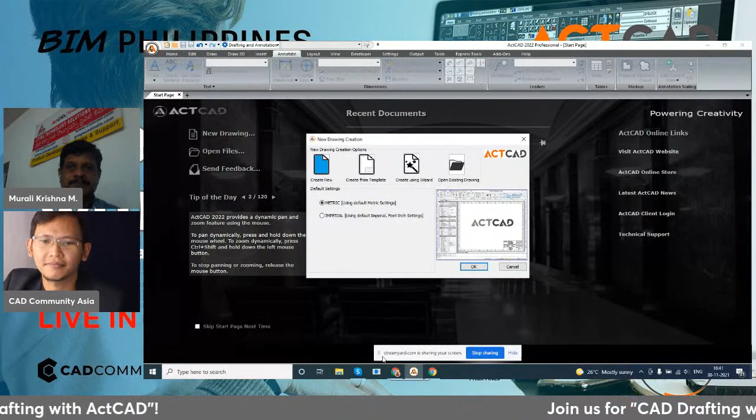I want to briefly explain about CAD software, computer-aided design. Most of you are familiar with it already. But way back in the 1960s and 70s, most companies did drafting manually. From 1980 onwards computers were introduced, and from 1990 onwards computers became available even at a personal level. Most companies and individual designers started using CAD for all their design applications.

Earlier, when I started my career in the automotive industry with Tata Motors, I started with a drafting board, designing drawings on big drafting machines. We used to set them at the desired angle, using engineering drafting devices like French curves, compasses, templates, protractors, dividers, and stencil pens to produce the drawing.

So a lot of manual process was there in the early 90s. But from the second half of the 90s, since 1995 onwards, a lot of CAD software came into the picture. Our original group, OMC Computers, started developing a CAD software in the early 90s called PowerCAD Draft, a DXF-based CAD software, which we sold to many companies in India, especially government establishments, and it gave some competition to AutoCAD in India at that time.

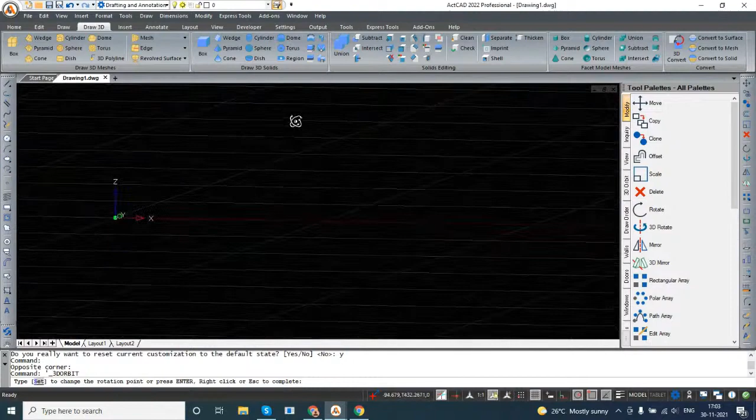Next is view. View is related to how your drawing is viewed in this CAD software. For example, regen, redraw all, zoom in, zoom out, zoom extents, dynamic zoom, panning operations, viewports, and 3D orbits, like creating and rotating this workspace in a 3D environment. So how I'm going to view my graphics window or my entities, these are all under that.

Similarly, here you'll see all the standard views, like visual styles such as wireframe model, conceptual. These are mostly applicable for 3D models, along with applying lighting, renderings, and materials. All these options are available here.

3D views is more important. If you want to migrate to orthographic projections, right now I rotated my screen to some level, but this command brings me to the front view. Or you can go to this menu, 3D views, and orient to front view, and my coordinates change to show the front view of this workspace. You can orient from any view to any view, even isometric, dimetric, trimetric views, all these options are available. For now, I'm setting it back to the top view.

So how you're going to view this workspace, the entire drawing, how you orient, rotate, zoom, and pan it, all these operations are provided under the view menu. Even the ribbons are mentioned in a similar fashion, like home, edit, draw, insert, view, layout, developer, settings, output, tools. This is more or less the same thing.

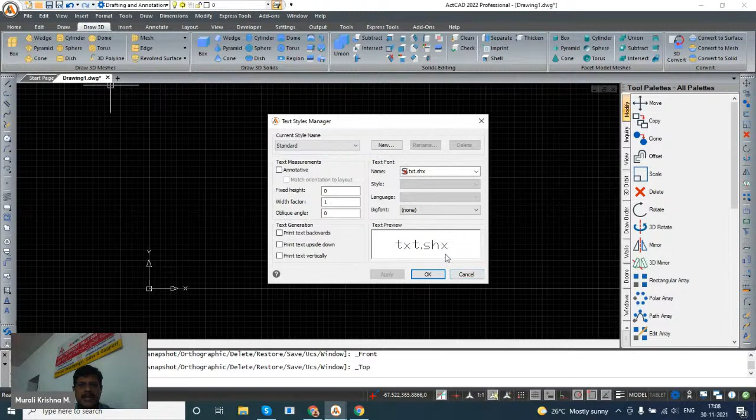Similarly, text styles manager—most of the styles, why we use styles is very important. It's a detailed subject, but briefly: in the drawing, if I'm having 1000 text entities or 2000 dimension entities, how do I control the style of all these as a kind of global setting? I can create any number of text styles, quickly modify them, and in one go select all text entities and apply this format, so I need not go back and change each entity's color, font, or text height individually.

Similarly, once a particular style is applied to dimensions, you can use multiple layers, multiple text styles, multiple dimension styles, multiple point styles, and several table styles. All these are possible—there's no limitation or restriction. Depending on the complexity of your drawing, you can create any number of dimension styles.

The advantage is that in dimension styles you can set a lot of preferences: how you want arrowheads, what types, what kind of text, what font, or what text style you want to apply to the drawing style. Similarly colors, extension lines, primary units, alternate units—everything. It's a very comprehensive dialog box where you can set all the properties of a dimension entity in one go and save it.

Once you save here, all 2000 dimensions in your drawing will reflect those changes. Similarly, if you want to change from one dimension style to another, it's very simple—you come back, create one more dimension style, change some or all settings, and apply.

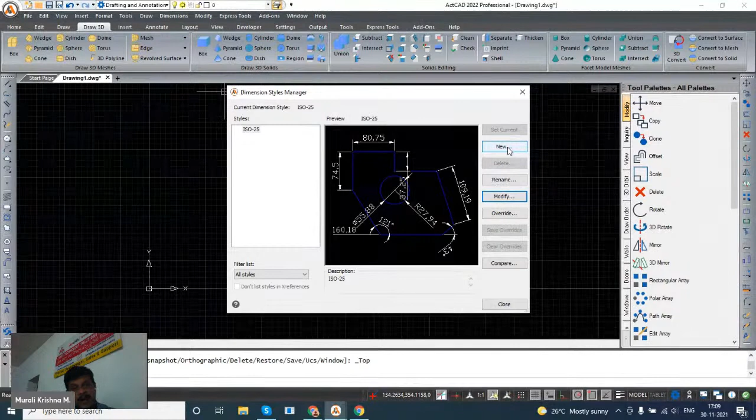So all these styles act like global settings to your drawing, and they reside inside your drawing database—they are part of the drawing database. If you create 10 dimension styles, they are part of your drawing file, in this case drawing1.dwg. Whether you use this drawing here or send it to your customer, friend, vendor, or supplier, all these styles will be transmitted along with the file. They don't stay outside the database; they are part of it.

That's why anyone can open this style again in ActCAD or any other software, say AutoCAD. They can edit or modify the styles there, and if they make changes, we identify them here too because the database is the same—we are reading from the same DWG database.

Everything related to formatting your entities—layers, layouts, colors, line types, line weights—how you want to represent your entities in a given drawing, you can find such commands easily on the Format menu.

Now Tools, as the name implies, these are additional tools to get more information from the drawing or perform operations on it. For example, we have ActCAD Explorer, which I'll explain later—how many layers, blocks, line types, or text styles are used in the drawing.

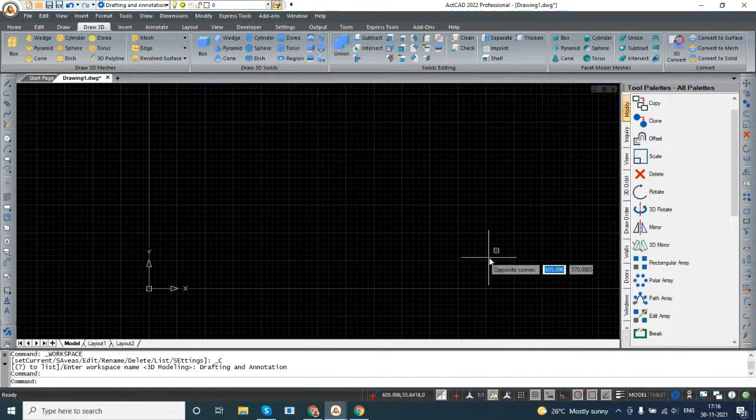Now dimensions, as dimensions are very vital in engineering drawing, we have created a separate menu with various types of dimensions like linear, aligned, angular, ordinate dimensions, radius, center marks, tolerances, geometric dimensioning and tolerancing, and again managing these dimensions, like one more link.

Though basically it is the same link, as I've shown under the format menu, this is available under the styles manager, for saving and restoring styles. Everything related to your dimensions, whether baseline dimensions, continuous dimensions, ordinate dimensions, or tolerated dimensions, size tolerances, geometric tolerances, everything is available under this menu.

Now, modify. As the name indicates, if you want to modify any of your entities, one or more of these entities, you will find those options here, like getting the properties palette, matching properties from one entity to other entities, creating groups, exploding groups, ungrouping them, and deleting, copying, cloning, modifying, mirroring, and alignment.

We also support associative arrays, rectangular array, polar array, path array, all these options, whatever modifications you want to do to these entities. Similarly, trimming entities, extending them, breaking them, joining, applying chamfers, fillets, editing tables, all those entity modifications. When I said edit, that is at the file level. When I'm talking about the modify menu, these are at the entity level. I hope you understand the difference.

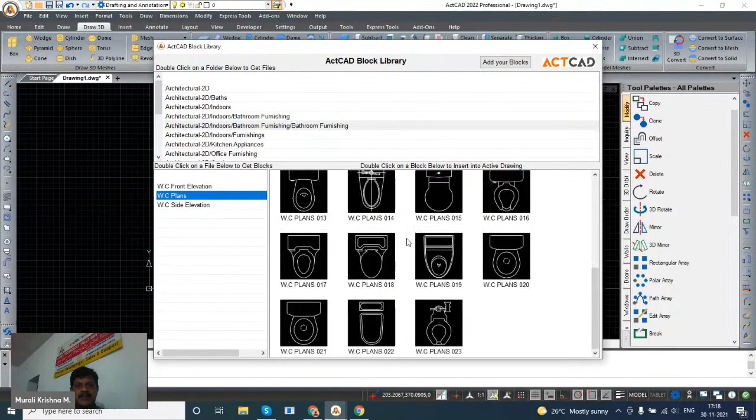So these are like opening a PDF and directly editing, converting a vector PDF directly to DXF. Similarly, using our block library, if I want to insert any standard symbols from this, you can directly insert that into your drawing, and you can adjust the X scale, Y scale, as well as the rotation. Now, if you go back, your symbol is inserted into the drawing as a block. ActCAD comes with over 5,000 inbuilt blocks in it.

Similarly, unit converter, auditing drawings, extract block attributes to an Excel sheet, importing point data from CSV or Excel files, and text data if you want to import from CSV, changing numeric text values, capturing the points to Excel. Lots of advanced options are available.

When you start your trial, we will give you the free videos module where you can see the importance of all these utilities. Hole table is very important for mechanical. Similarly, exporting a table to an Excel sheet, or importing table data from an Excel sheet. Next month, meaning December, we will have one more release, and we are making a lot of improvements with the Excel integration to the CAD format. Like that, these add-ons are available.

And window, like any other Windows application - close, you can open multiple things. Here I have the start page, here I have the drawing. Like that, I can have multiple drawings. You can close them, or close all, cascade them, tile them horizontally, or tile them vertically. All these options, like arrange icons if you have more documents open. But right now I have only this one. So if I want to make my start page active, I can do this. And again in the window, I am disabling the cascading options. So now you can switch these options using these window tools.

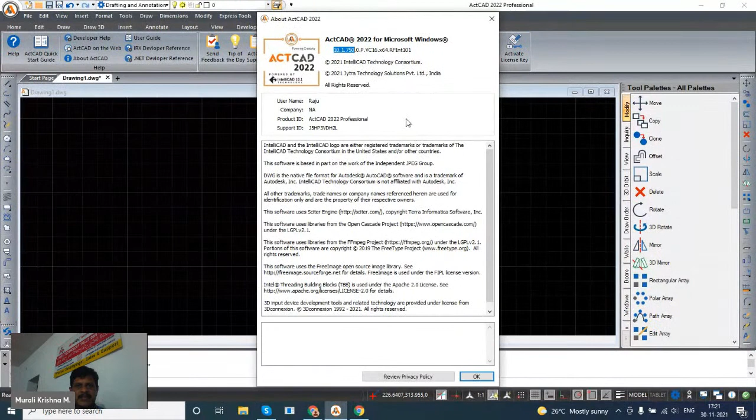Finally, the help menu. As you understand, any software will have complete help, developer help, user guide, tip of the day, our website, check for any new version available for this product on our server. If you want to send feedback to us, benchmarking graphics, and about ActCAD, which version you are using at present - 10.1 is the latest release of IntelliCAD, and 750 is the latest version available. Every month we do a lot of releases and patches, and you need not reinstall or uninstall the software. You simply go to the help menu and click on check for updates, and it will find if there is a new version available on our server, and automatically download and apply the patch to the installed version without the need of re-licensing.

So the menus, the ribbon tabs are also carefully designed, like draw, 3D, insert, annotate. The names are slightly different, like the layout tab is available here, view is available, and developer for developers and programmers who want to record scripts, writing programs like LISP, C++, VB.NET. If you want to write more programs, you can use all the options here.

And settings, as I mentioned, like options - for example, if you want to control drawing options, drawing limits, drawing settings, workspace settings. If I click this, what is my default save format? If I always want to save my drawing in 2007 format, or save my drawing every 2 or 3 minutes, what are the default file paths for support paths, templates, hatches, line types, blocks, hatch patterns. This is also very similar to other CAD software, but you can set all these options at this level. Now, these options are at the application level. When I mean application, it is nothing but ActCAD. ActCAD is a software package, it is an application.

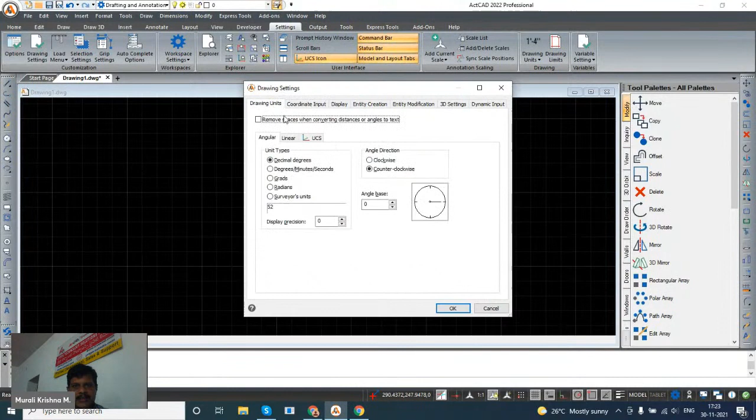Like drawing settings, if you want to set the drawing limits or settings, you can specify them here. There are keyboard shortcuts available too, like DS is the shortcut. Right now you can see the drawing settings, like drawing units, angular settings, linear settings, UCS settings.

Coordinate inputs, how you want them, snap and grid whether you want to enable them, and entity snaps, which we identified earlier. Now entity selections, whether I want to increase or reduce this pick box size, or the selection aperture, or entity snap representations, and the drawing limits, tracking.

All the settings related to your drawing can be made here. These settings are applicable to a particular drawing or the active document you are using. So this is the brief overview, and this is called the graphics menu, and these are called toolbars.

Toolbars can always be moved either horizontally or kept here. If you want to show more, right click here to see which menus you want to show or disable. There are so many toolbars available; if you always work with images, you can enable the image toolbar and keep it here, and close it if you don't need it.

So there are many toolbars available, and this is called tool palettes. The most widely used things and most important commands are all available here.

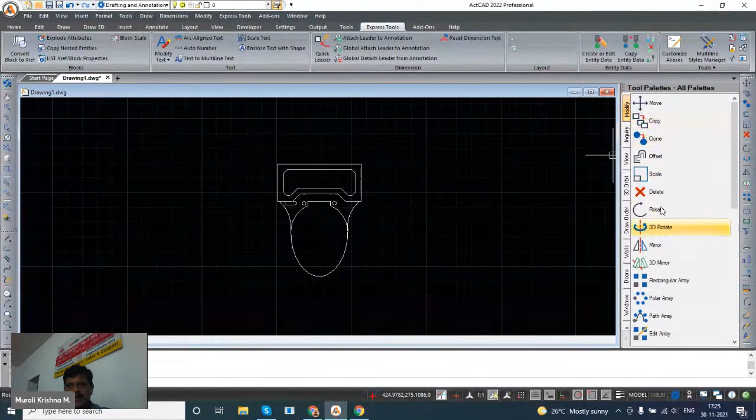Similarly, if you click inquiry, tools are available here. If you click view, as mentioned before, like front view, top view, side view, instead of going to the menus you can click directly here to access those commands. And again the 3D options, draw orders, changing, inserting walls, doors, windows.

You can also insert more tool palettes to your stuff and create your own. If you have popular settings, you can add them here too. These are some standard symbols, and you can directly double click to insert them into the drawing.

You can customize these tool palettes based on the expert level or advanced options you need—add, remove, or move them—and again this is the toolbar. And as you see, this is the command prompt.

Whatever inputs or inquiries you want to give, this is the command prompt. If you want to see a bigger version, simply press F2, and all those keyboard shortcuts and function keys are available here. Now you see here, this is F2.

F3 for enabling or disabling entity snaps. Tablet options, F4. And isometric cursor, if you want to draw in isometric mode, simply enable F5, and then your cursor will behave like an isometric constructor.

If you want to display the coordinates, they are being shown here. And if you want to enable the grid, the graphics grid on the back end, F7 is the shortcut. And orthogonal, entity snaps.

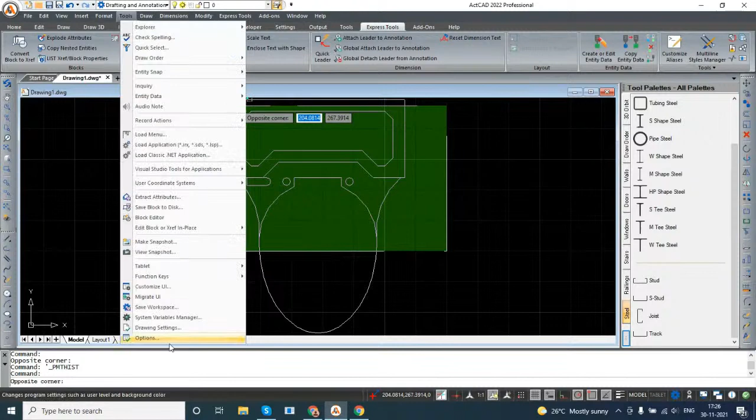If you want these settings, we provide them under the customize menu, like under tools you have these options. Similarly, customize user interface, customize UI—here again we have all these workspaces, whatever we have defined.

You can define your own workspaces, either through this interactive customization dialog, or you can go back to the CUI file available in the install directory, and make a lot of changes—creating new toolbars, removing some toolbars, inserting new ribbon tabs, all those things.

Similarly, aliases, and these are the keyboard shortcuts I explained, like F1, F10, F2. If you want to make any change, you can always click and change it here, or for F5 if you want to use something else, you can change it.

But mostly we keep them very similar to other CAD software, because most people, for example, F8 meaning ortho mode, are already habituated in other software, and we don't want to give some other shortcut for that.

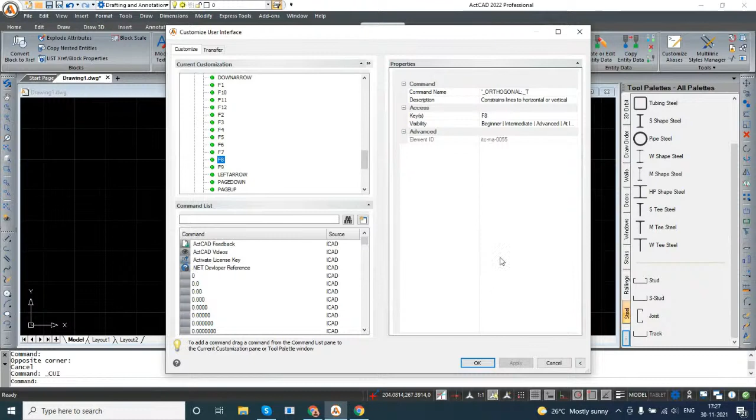So that's the reason we are maintaining the same F8 kind of stuff here. Like this, you can also create, and you can import the settings from other software, and export CUI files - that interactively you can do.

The keyboard shortcuts are also all available here. For example, beside everything you have Control Plus, Control Plus 1, Control Plus S. You can create and customize everything in your CUI file, either interactively, or based on your expertise level, you can go to the CUI file directly and make necessary changes. We also support CUIX, the encrypted format of CUI, which is now supported in ActCAD. You can import it if it was created in other software. So like that, you can do a lot of customization.

Once again, this is the bottom panel. Here it always shows the indicator and the message. For example, if I go back to the home menu and click Line, now I'm creating a line, and you are able to see dynamically the coordinates of that one. We also support dynamic screen input, like how we are creating here, and all the options are available here. Now it is showing the current status.

For example, if I want to insert a block, this block I already have in the database, so now I'm able to repeat it once I get into the same drawing. And you are able to see the cursor movement and the coordinates here.

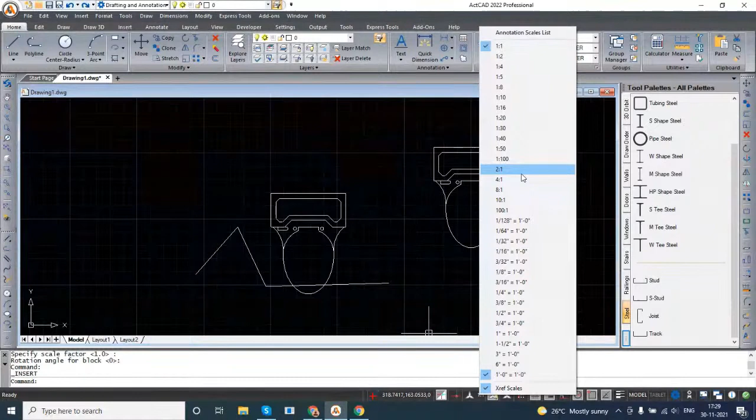And this one is cursor mode, whether you want to enable or disable, and the crosshair mode, how you want to show them, and annotation scales, annotative scales. Once you want to plot your drawing entities at a different scale with respect to your paper size or plotter size, you can use the annotative scales, and all the supported annotative scales are available here. Similarly, how they want to be visible, all the settings are here.

And here, snapping mode - how you want to snap to these entities, enable running snaps or disable running snaps. If you are enabling running snaps, whenever you keep clicking on these things, it will automatically try to snap to the control points. And if you click on settings, you will get the snap and grid settings here. And entity snaps, as I mentioned before, like endpoint, start point, whatever is default enabled - whether you want to select them all, clear them all, or show only the major ones. So you can do the settings, and either apply or cancel.

The other thing is dynamic screen mode input - if you want to switch it in or out. What is dynamic screen mode? For example, if I'm typing, 112 is there. Now I can directly type the value here. So that particular line has already taken this value. Now if I want to type 80, the line length is automatically taken as 80. So this input, I can dynamically enter my values on the screen graphics window itself, instead of coming to the command prompt. That is dynamic input. Whether you want to enable or disable it, you can do that here.

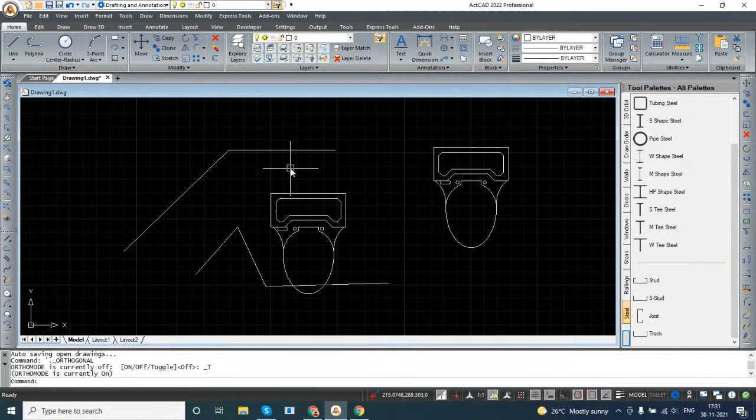And ortho mode, again F8. If you want to enable it, while drawing a line, you can also use the Shift button. If you want to send it either perfectly horizontal or perfectly vertical, ortho mode has to be on. For example, if I switch this off, it can go into any direction. Now if I switch it off, it is going in any angle, not assuming it should snap to perfectly horizontal or vertical. So if you enable ortho mode, like in orthographic projections, that will help take perpendicular lines from the current cursor location.

The next one is polar tracking. If you want to enable polar tracking, with respect to the point while drawing a line, you can snap to a specific angle value - whether you want to set it at an increment of 5 degrees, 10 degrees, or 6 degrees, you can do that.

And as I mentioned earlier, these are all the entity snaps. Either you can go and do it from drawing settings, or from the tools menu, or directly from right click. We have given the popular shortcuts here, and either you can enable or disable them. Similarly, if you come and...

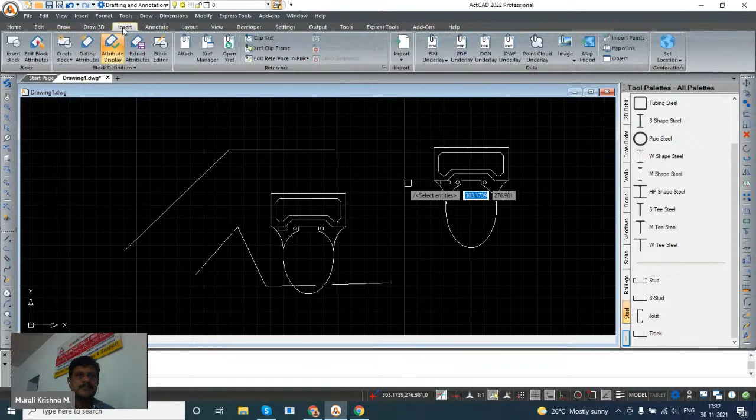In the draw menu, all these settings are also provided. This is the example of running snaps. If you are having some problem picking entities, you can enable these running snaps, and the software will behave a little intelligent and try to capture the snap points from other locations. The same settings are available from multiple locations, including this bottom menu which we can access from here.

This is about line weight display, entity track, and line weights, whether you want to enable or disable the display. So if the line weight is 2mm, enabling this will display it at 2mm. Depending on your requirement, you can either enable or disable it.

As I mentioned, this is switching between the workspaces. And this is another thing about our graphic device.

In ActCAD, we support 3 modes: basic mode, OpenGL mode, and OpenGL ES mode. Right now the advanced OpenGL ES is disabled because there are still some compatibility and stability issues with the OpenGL ES graphics drivers. But the default setting is OpenGL. To operate ActCAD software, you don't need dedicated graphics hardware — whatever drivers you have, onboard or dedicated, every computer will have an OpenGL version, and we need at least version 2.0 of OpenGL. If you have a higher version, it's better — you can get better graphics performance from the software.

Before going to the next topic, I wanted to show you the most important thing here. As I mentioned, there are a lot of system variables. What is a system variable? Most users may not be aware. There are a lot of variables available inside the drawing database — for example, file dia, which controls how something should be displayed. Now we have all these system variables available, along with their limits.

For example, CMD echo — if you check it, it shows a range of 0 and 1, determining whether it should display or not in the command prompt. Similarly, if I want to change the pick box — the pick box I showed you earlier from the dialog.

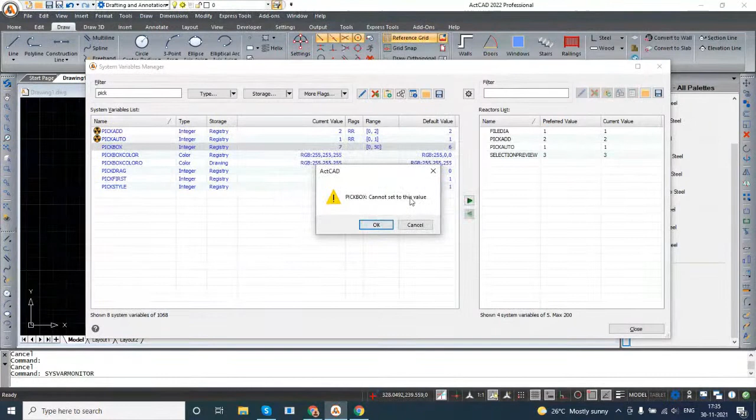Now if you see, the pick box entity is available here, and what is the current value? I set it to 7. But what is the permitted range? 0 to 50. And what is the default value? 6. So if I want, I can even modify them here — this is the value I can change. But if I try to give 99, I'll get a warning, because it cannot go beyond the permitted values.

What are these variables? These are nothing but the settings or preferences or values available inside the drawing — for example, pick first behavior, either set to 0 or 1. A lot of advanced CAD users are familiar with these system variables.

But what I wanted to show is we have a sysvar monitor if you want to quickly find some settings inside ActCAD. For example, if somebody wants to increase the text quality, I'll repeat using this sysvar monitor, and type 'text'. Now all the system variables related to this are coming up.

What is QText mode, print text output, mtext ed — these variables are very much similar to AutoCAD. Now here, text quality — at what quality do I want to set the value? 0 and 100, so the least value is 0 and the maximum value is 100.

Similarly, text size — this is how you define these values and settings. All the system variables are part of your drawing; they are saved inside your drawing file. If you change this value and save the drawing, it becomes part of the drawing, and if you open it in another ActCAD version or a competitor software, the same value will be reflected there. Similarly, text style — what is the default style, whether you always want to keep standard or something else, because right now this default drawing has only one text style.

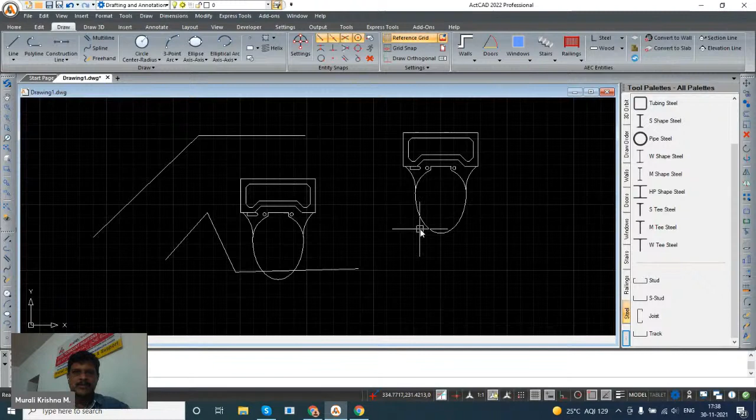Before I forget, this Explorer is another useful tool available in ActCAD. If you double click text styles, it will show all the available text styles in this drawing, and line types - what line types are available and what they've used. Layers, layer status, what views we have created, and what blocks are used in this drawing.

So if I'm double clicking this block, it will show up. Okay, so it is opening all these things at the bottom.

Keep on going here. Maybe I can map them here. So like this, it will open up all the things under the palette, and how you are going to display them, you can find here. So like this, now text styles opened here.

Now you go back. You can also separate them like this - I have taken it out from here. Now again, you can dock, auto hide, make transparent, or if you want to close, you can close. Come back to the Explorer, it is available.

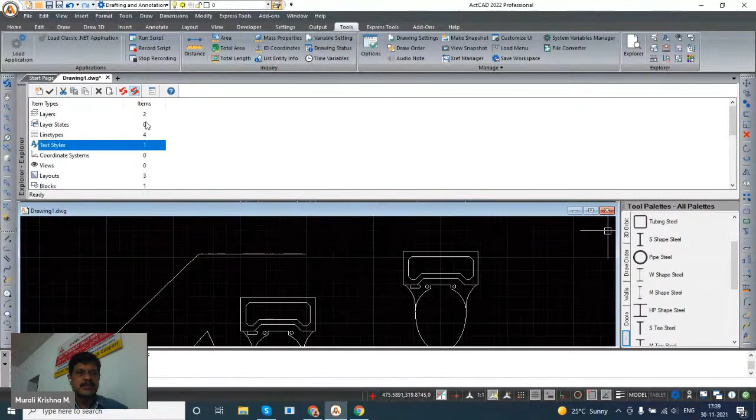What are the external references available in this drawing? Right now it shows 0 items are used. What are the current blocks in this? Now double click, this is the WC plans. How are you going to orient this one? You have to set whether you want this Explorer to be horizontal or vertical. But copying the block from one drawing to another drawing is also possible.

For example, I have created one more drawing here. Now I am coming here from the Explorer, double clicking the block, selecting it, copying, and coming here under this block to paste it. Now this block from this drawing I have easily copied and pasted into this one. Now it is part of this drawing's database. Let me go back and insert.

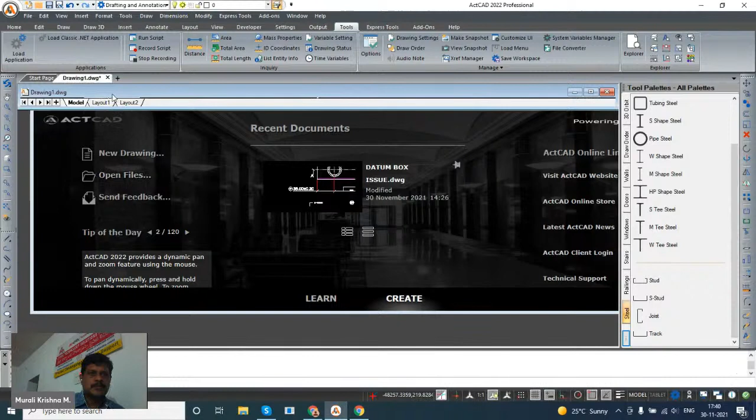Now you see, that is part of your second database also - whatever is here in the other drawing. I am going to the Explorer once again, paste it. Close here, close here. And again in this drawing, if you go to insert block, that is already available because I already pasted it into the database. So even if you have 20, 30, 40 or any number of blocks, from one drawing to another drawing you can easily copy and paste.

These are, you are pasting them as blocks. But it is not only related to blocks, it is related to anything else - like dimension styles you can copy paste, layouts you can copy paste, materials you can copy paste, groups you can copy paste. So this ActCAD Explorer is also another powerful tool.

And now we also talk quickly about model space and layout space. I am closing this drawing. Model space means this is the 3D modeling space, and layout is basically a kind of paper space.

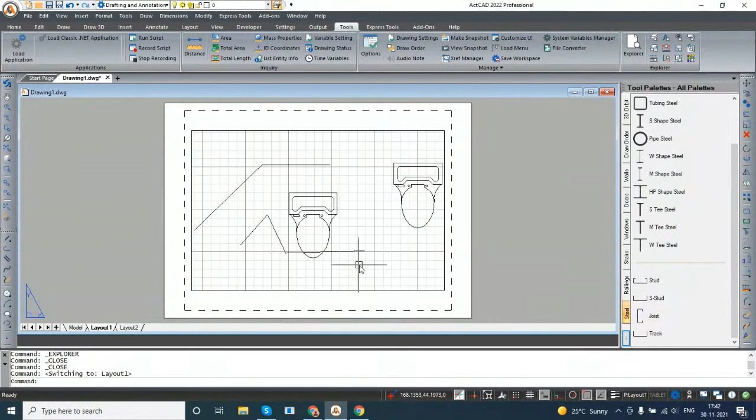So you cannot rotate these views, it is only a 2D representation. And whatever you are seeing here, these are called viewports - like the view boundaries, how I can adjust, and this is the position of the view. So it has nothing to do with the entity you are drawing. Even if you delete it here, you are only deleting the representation, but if you go back to the model space, that entity is still there.

So what is the advantage of this model space and layout space? Now I am having this entity here, and here I can insert viewports. You can also go to the layout, and here we have viewports. If I want to insert 4 viewports, you select from here to here, one layout or multiple viewports - it's all possible here. 2 viewports if I want to insert.

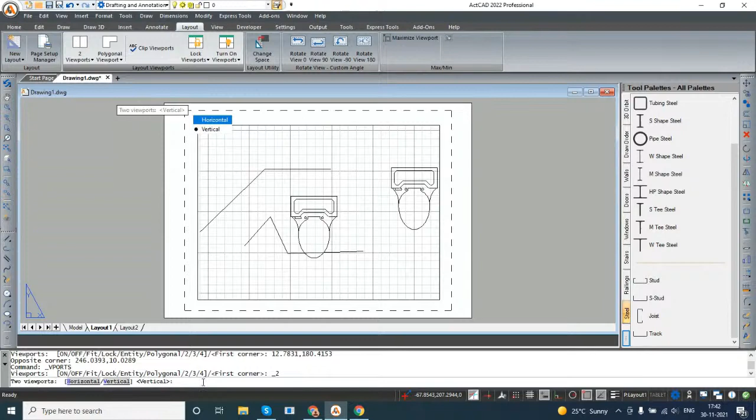Again, it asks horizontal or vertical - vertical. Now it is asking the first point of the screen and second. Okay, now it has inserted 2. See here, now this is one boundary, this is the other boundary.

And you can use them in 3D models - for example, if you have a 3D model, you can insert front view, side view, top view directly from the 3D model based on availability. Now, in this case, I right click and set the properties. This is available at a particular scale - this is the custom scale. Let me put it as 1.

So now, in this drawing, I'm showing this western commode at 1:1 scale. But in the other drawing, I wanted to show it in double scale or half scale. Again, you go here and change the scale, maybe to 2 here. So this is double the scale, and you can adjust the boundary and position as needed.

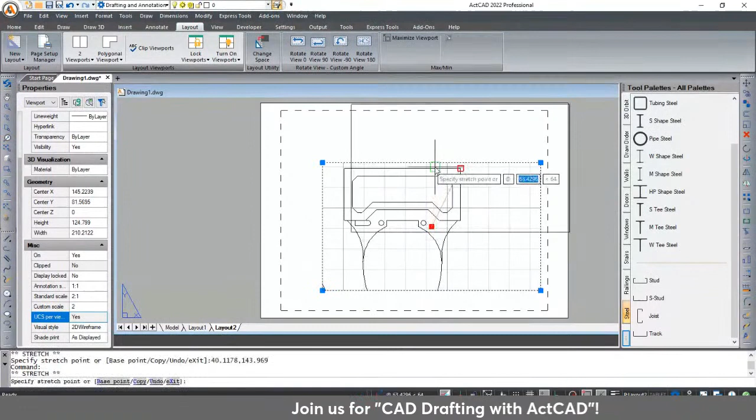Now, the same entity in this view I am showing as 2:1 scale. In this layout, I am showing it 1:1 scale, like a detail view. Whatever modification I make to this one, the changes will reflect in both views. For example, if I rotate this here, that is the model space, and it has associativity to this one.

So now this is rotated here too. This is mostly for plotting purposes, creating 2D views, orthographic views, and giving dimensions, irrespective of the original geometry scale. For example, if you are designing a very big vehicle, the actual size is too big, but you cannot plot that original size to the drawing. That's why you can insert a view at an increased or reduced scale. So that is the concept of viewports, layouts, and model space.

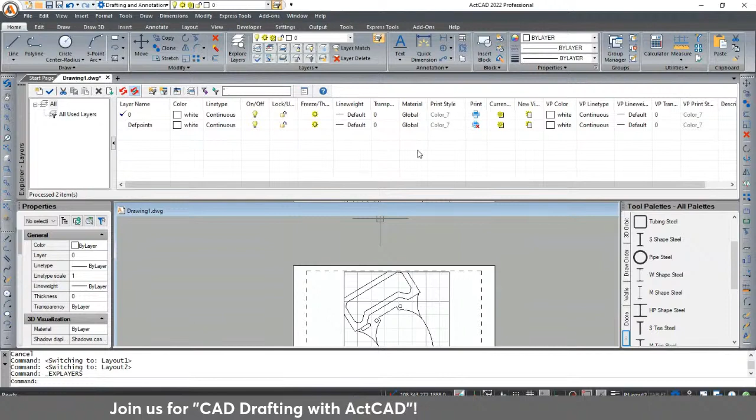Now I have one more topic I wanted to convey, the concept of layers. For example, if you go to the home tab, here is Explore Layers. So what is the concept of layers? In order to manage all these entities in your drawing, you can define an infinite number of layers.

For example, I am coming to this particular drawing once again. Now I'm able to see the model space. Now I want to move this to a different layer, for example layer number 2. I don't want to see this one, so maybe I can set this layer, move it to the layer, or in the properties palette you can directly go and set it to layer number 2. Now those entities are on layer number 2.

For layer number 2, I can also apply different kinds of styles. Let's say I change the color, change the line width, the locking concept, or the line type—I want to change it to dashed lines for all entities on that particular layer. And if I don't want to show them, I can simply switch that layer on or off.

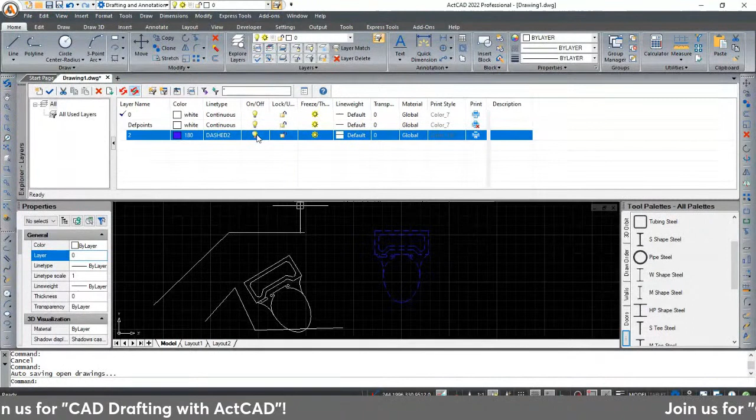It is like plastic sheets. You can create the plastic sheets one behind the other, one above the other, and create different entities on different plastic sheets. If you remember the old overhead projector kind of stuff, if you keep one sheet, the contents drawn on the plastic sheet are only projected to the screen. And if you overlap one more plastic sheet with different entities, then both can be seen on the screen after projection. So like that, you can insert multiple layers.

So those are the physical plastic layers which are transparent, but here these are the digital layers available inside the CAD software as layers, and you can create an infinite number of layers.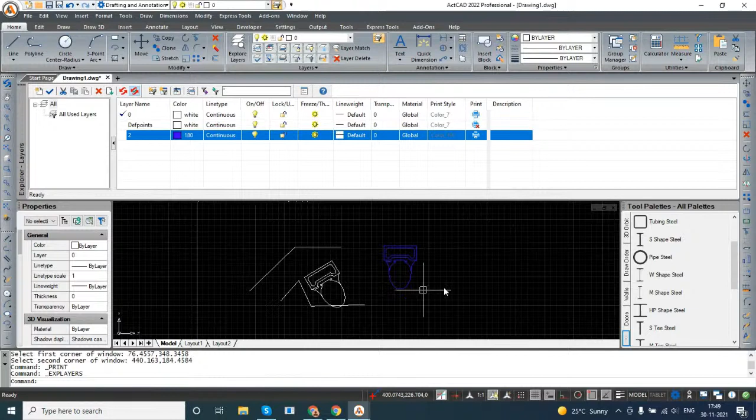So you can go back and unlock it, and you can change the line colors. At a global level, for all the entities in this particular layer, these changes are applicable. There are so many advantages of layers, which we have explained in our quick start guide and also in the detailed help menu.

So that is the concept of layers, and you can create any number of layers without any limitations. You can name them any name you want, like doors, windows, and our 3D entities like AEC objects for the BIM elements. If you are inserting a wall, automatically a wall layer will be created. If you are inserting a table, the table will go to the default layer.

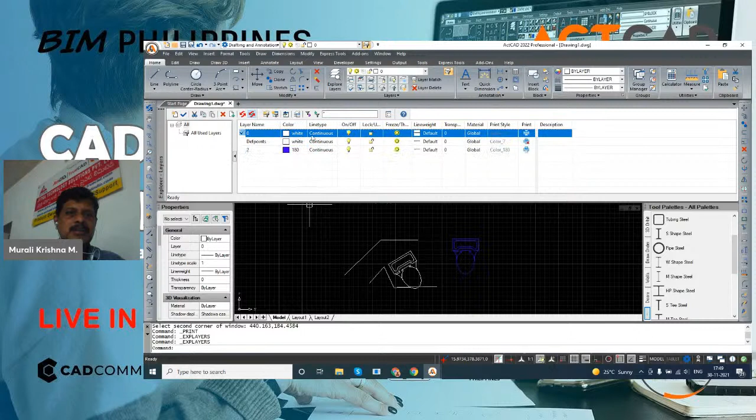There always has to be some work layer, which has this check mark - that is the default layer. Whatever entity you are creating or drawing will go and stay in this layer by default. If you want, you can always change it through right click, in what is called the properties palette.

Now for some of these operations, with the mouse wheel, if I'm rotating, that does zoom in and zoom out. Similarly, if you right click, you have so many options like real-time panning and real-time zoom.

If you want to do it in a 3D sphere, to rotate and see - these are all planar entities, 2D planar entities. But if I want to rotate them, right now I'm not doing any 3D modeling in this, but you can directly see all of them here. And if I want to cancel and go back to my other view...

View menu, 3D views, and then top view. So here also under the view menu, you have most of these zoom operations: dynamic zoom, previous, zoom to previous, zoom left, and most of the time we use zoom extents - Z enter and E enter.

Now when I'm typing the zoom command, it shows multiple options here, like zoom in or zoom out, zoom all, zoom center, or dynamic. And for extension, when I used E, it took extents - sorry, because that starts with E. That is the kind of syntax and the level you can always follow throughout this one.

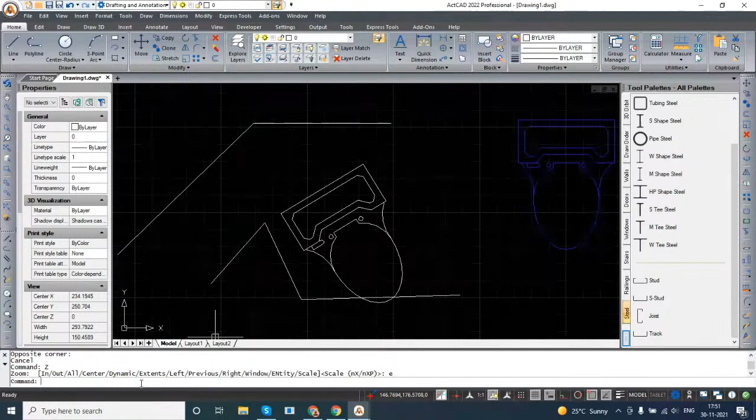We also support clickable keywords. For example, when I'm typing zoom, instead of clicking, you can also do the right option. Now it is asking what is the upper right corner, and you do this. So whatever the value from here to here, whatever the distance, with that much scale factor it has scaled, zoomed my entities.

Basically, it is not changing the size of the entities. The zoom and pan operations are basically enabling you to see it better, because your graphics window space is limited - you have a very small screen and cannot see a very big drawing there.

If you want to do some operation, you can zoom in here, and REA is a command like regen all. When you do it, now it is zoomed properly and you can perform your operations here. Like if I want to do a hatch inside this one, you can select and then click the point, enter, and do it.

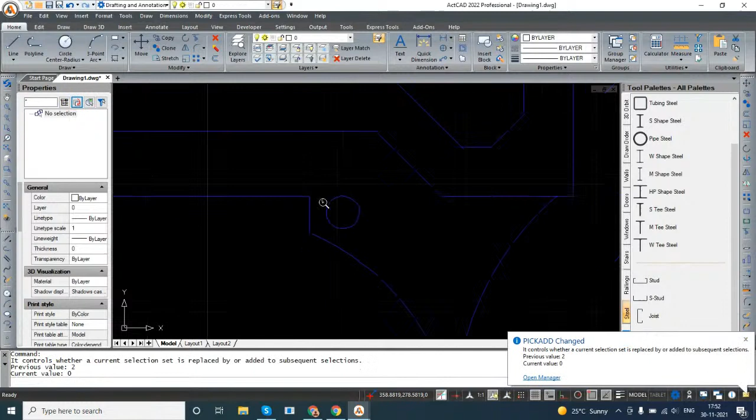But right now that hatch is not visible because the entity scale is very small. So that is the reason I need to select the hatch entity, and then increase or decrease the scale. Maybe I can show it on a separate entity - like this circle, I am applying hatch.

Now you see, because this circle is much bigger, for that particular scale it is visible, but because this diameter is very small, that is not visible. So like that, you can select these entities and do that.

And if you want to select such entities, you can also use this quick filter, and filter options are always available - layer 1, layer 2, like you see here. Now I'm getting the hatch. From the tool palette, when I'm enabling that, I want to reduce it because that was no longer visible to me on the screen for selection. But when I selected like this, I'm able to see that.

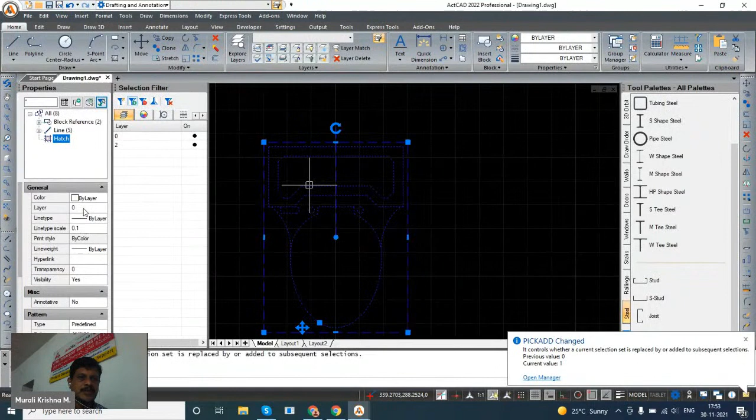Okay, now I'm going to the filter option. Layer 0, this entity is available, and this maybe I will still reduce. Okay, this scale I have to change to 0.1. You see, you are able to see that. So though I am unable to see the entity, the entity got created earlier.

So now if you want to delete, you can select it and delete it from your drawing. So these are all the advantages of creating the zoom in, pan operations, dynamic pan, dynamic rotation, like that.

And as I mentioned before, the entity snaps - if I want to select the endpoint of this, let us do one small activity here. Okay, this is the polar tracking. Now entity snaps, I have cleared everything. Now if I want to draw one line exactly to this one, you see it is not allowing me to do that. So that is called entity snaps.

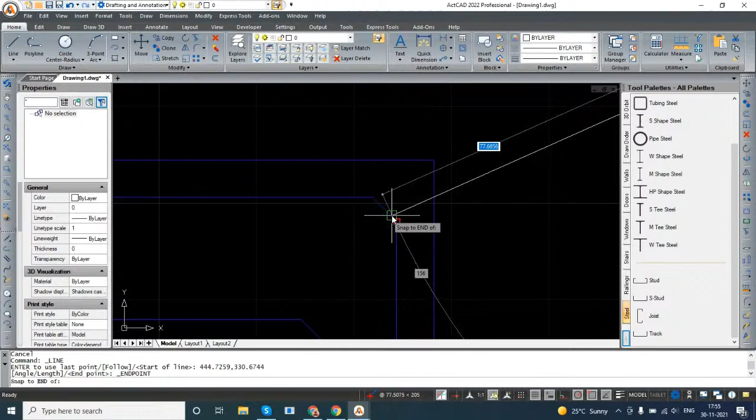Now I'm going back to this one. In the settings, now I am enabling, let's say, endpoint. Okay, now you see I'm able to pick the endpoints, but not the midpoint here. So here also I'm unable to meet it. Either I can click that endpoint or this endpoint or this endpoint or this endpoint.

So based on your requirement, you can go to these snap settings and enable nearest, perpendicular, parallel, or quadrant. Now you see it is able to identify the midpoint also. So like that, you can create the snaps. The entity snaps are very useful. And object tracking, entity tracking, e-tracking - that option is also very useful.

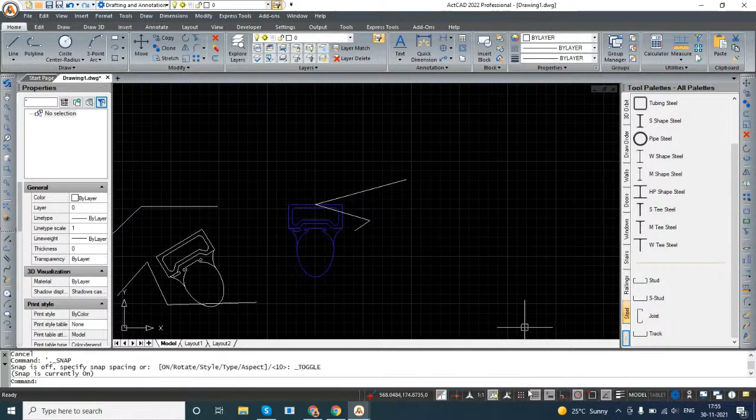And as I mentioned, orthographic is for perpendicular control. Now, if I want to draw something - this is snap to grid. So now I will be able to snap to the grid points also. You see here on the grid, if you want to draw something, that grid size you can always adjust. Now you see I'm able to enable the snaps, like the magnetic pick points onto the snap. So that is the option here.

Orthogonal on/off and entity snaps. Okay, again I'm selecting, click OK, like this. Now you see, now the ortho mode also I have enabled. Now when I'm drawing here, those magnetic lines are showing me - this is called the entity tracking or object tracking. So now I know that I am drawing a perfect horizontal line. Now I am drawing a perfect perpendicular vertical line.

Now you can also snap to this endpoint. Along that line, I'm creating - this endpoint is lying on that straight line. So like that, these are called E-tracking, entity tracking, or object tracking. E-track means entity track, O-track means object track. Some softwares call it O-track, we call it E-track, or vice versa, something like that.

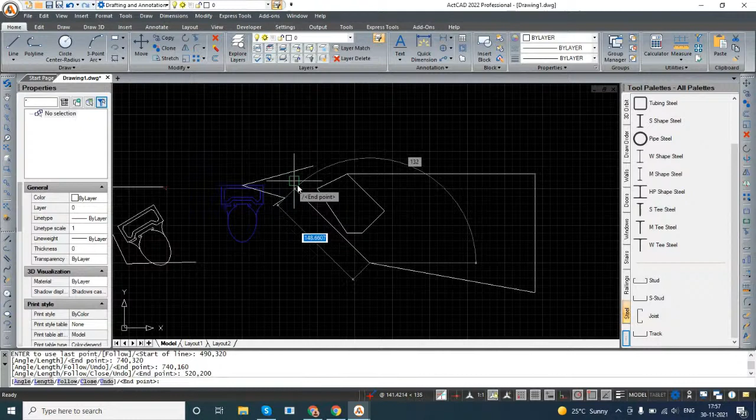But basically, if you want to track the entities - now I want to create a line which is inline to this one. So that is how I have enabled that snap. Now let me disable this because both are getting conflicted. Now when I disabled it, you see I'm able to get the perfect snap of that one.

Okay, now again if I want to draw, you are able to see those green lines. These are the rubber bands. So even I am able to find the virtual intersection. Now that line is a perpendicular exact intersection of this line. Now I can complete that line. So that is called object tracking.

So we will move to the next topic. I have shown most of these basic settings, the interface, the controls, the snap settings, E-tracking, O-tracking, and the layer settings, what are layers - we have seen everything. Now quickly we will see the line.

This is the standard line segment. You can create lines here, and to create lines also multiple options are there. You can go by relative coordinate system or absolute coordinate system. And the circle, as you can see, there are so many ways of constructing circles - tan circle, using 3 points, using 2 points. They are very self-explanatory, how you want to create a circle.

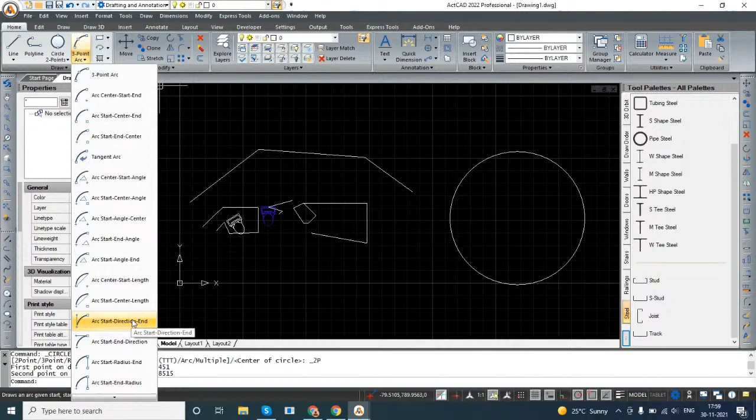Similarly, arc - so many options are available, whether you want to create a tangent arc, a 3-point arc, arc with start point, angle and center, or arc center, start, angle. Why these many options? Mathematically, there are so many possibilities to construct an arc based on the user requirement and user input. You can do that. So arc, line, and circle.

But why I skipped polyline? Polyline is a combination between these two things. Now you see, again it is showing the options. Now if you want to draw an arc, I simply clicked on arc.

Now the arc is being continued. Again, if you want angle, center, or direction, or you want to convert again to the straight line, you can do that. Again, entity track is created.

Now what is the difference between this and this? These are 3 separate lines, 3 separate entities. In the history also, it is showing 3. But when I'm selecting this, it is one entity. Though it is a combination of line, arc, and another line, it is behaving like a single entity. So that is called polyline.

And you can always explode it. Now when I exploded it, you see it became separate entities. In the history navigator also, you can see I'm having 2 lines and 3 arcs.

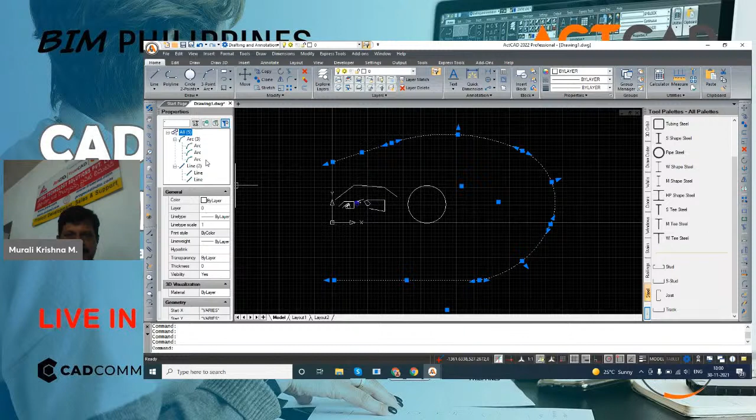Polyline. So even if you take rectangle, rectangle is nothing but a polyline. And polygon is also nothing but a polyline. Rectangle is nothing but a single polyline. Now when you explode it, it became 4 line segments. But for convenience and for drafting purposes, you can always use this one. Similarly polygon is also an entity which is nothing but polyline.

Now you see whether you want multiple or single, number of sides, how many you want? I want 8 sides, that will become octagon, and specify the center of this polygon. So inscribed circle or circumscribed circle, you can decide, and you can create and put the point.

Once again, I'm telling what is the rationale behind these constructions. I'm using the included angle of any polygon which is equivalent to 360 by n, and it is a combination of all equilateral triangles. That is what is nothing but polyline, polygon. If you are having 8 sides, 8 equilateral triangles, and the included angle of each triangle is 180 degrees, and the angle between 2 sides is 180 minus 360 by n. That is the standard formula.

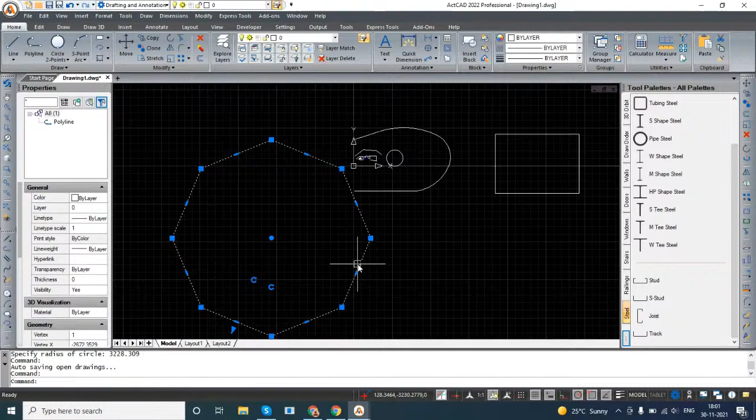Whether we write the program or somebody else writes the program, they have to abide by the same logics. Again, once you explode, even if you write your own program using a Lisp program or .NET program, you have to go by the same mathematical fundamentals. We cannot change the geometry and the basic rules of mathematics.

That is what I'm trying to show again and again. Whatever you are creating, how you are writing your code, whether it is efficient, or if somebody else can write a program much easier, much faster, much simpler, that makes the difference. And at the end of the day, how much you are paying for a CAD software, whether it is really worth it, and our motto is this one only.

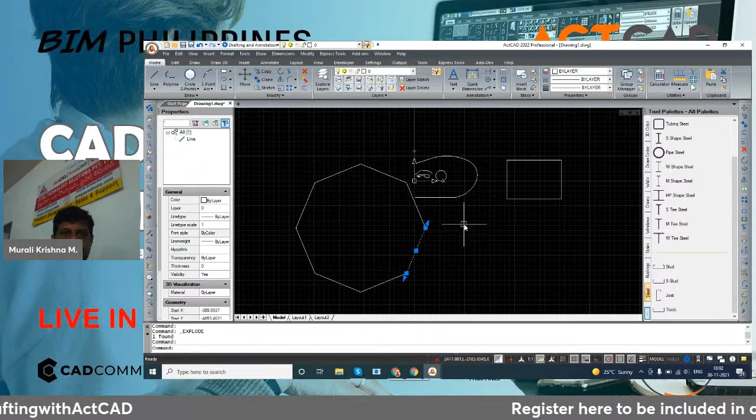Instead of paying huge and exorbitant costs, you pay one little fee so that every individual, every school, every student can afford a CAD software and use it for any commercial projects, whether it is a small project, hobby project, small business, internal design applications, home modifications, or if you want to design some cot or bed for yourself. You can use software like this and take advantage of all standard blocks, symbols, 3D models and 3D items from the internet. A lot of content is available even on the internet.

So like that, we have discussed about various 2D entities. And once again, if you take any complicated drawing, it is a combination of these primitive entities, the basic geometric entities like line, arc, and circle.

One more thing I wanted to cover here, these are the elliptical arcs. So ellipse is nothing but again the same mathematical logics, having two focal points. Circle is having one center point, but ellipse is having two focal points.

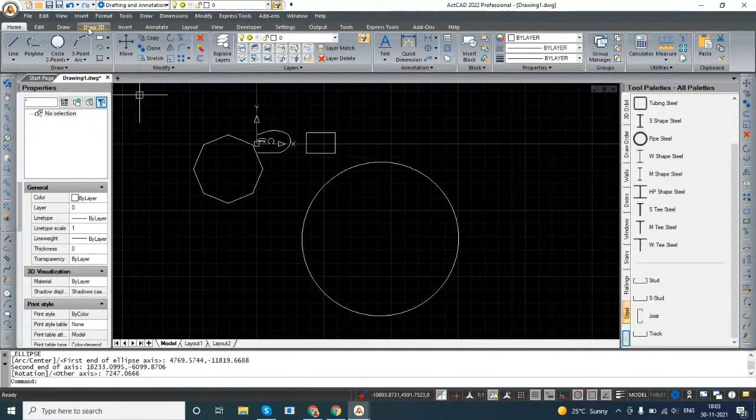Okay, so now this is a kind of end of the ellipse I have selected. Under the ellipse there are multiple options: ellipse with axis and axis. So this is the major axis I have selected, and this is the minor axis I have selected. Again, ellipse, axis, and then rotation. For example, I have created this ellipse, and with what rotation you have this angle. Based on the type you wanted to give, you can do this way.

So this is any of your complicated drawing. Another entity is called the Bezier Spline, or this thing, this is called a spline. Again, it is driven by mathematical equation. The degree of any spline, the minimum is 2 and maximum is 24, and there is no other possibility beyond these two values.

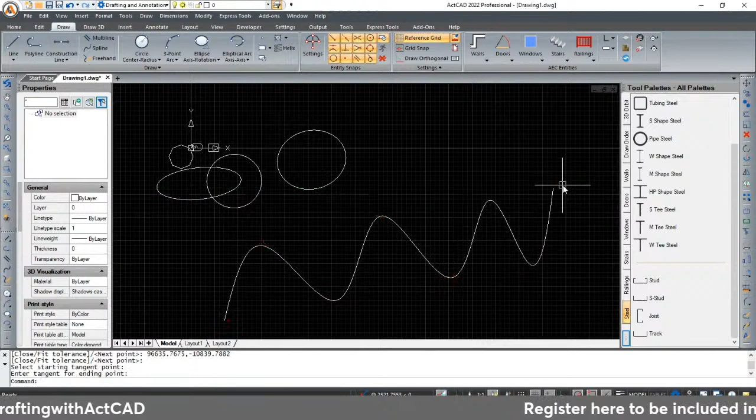You can set the value depending upon the degree of freedom, how much deviation it is taking from the vertex point, how much mathematical or Bezier deviation it is taking from that one, that is another logic. This is mostly used for free-form kind of shapes and designs, like if you want to design some clothing, some dress inside ActCAD, you can adjust it as a free form and do the design.

Basically, it is controlled by the vertices, and if you want to increase the number of vertices, again this is called the properties palette, as I always mention, this is very important. All the properties of this entity you will be able to see here. Now you see the degree of this one is 3, the way I created it, so it is a kind of third degree deviation it is taking from the vertex point. The maximum possibility is 24. So if you need too much flexibility and deviation, take any drawing or any complicated entity or shape, it is a combination of these basic entities.

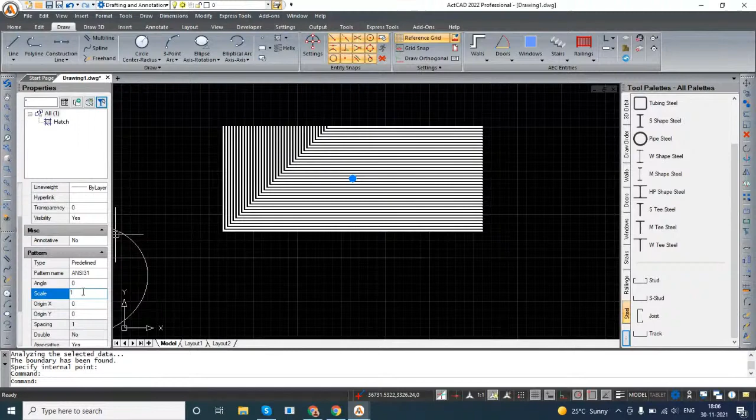Let me do one dimension also, so we will create. Okay, now this is my rectangle. Let me create a hatch. I'm focusing more on the principles and concepts of this CAD software. Now this is the hatch I'm selecting, and the scale is too low for me, so maybe I'm keeping it 40. That is also less, maybe I can keep 300. Okay, that's how I created the hatch.

You can change its color to a different thing. Most of the things you can control from the properties palette. Whenever you are selecting a particular entity, that entity's properties are highlighted in this properties palette. If I'm selecting this, these entity properties are highlighted here, and these are called grips. It is not highlighting the boundary because that is associated to the rectangle. Now you see, when I moved the rectangle, that hatch got automatically moved because it is an associative hatch.

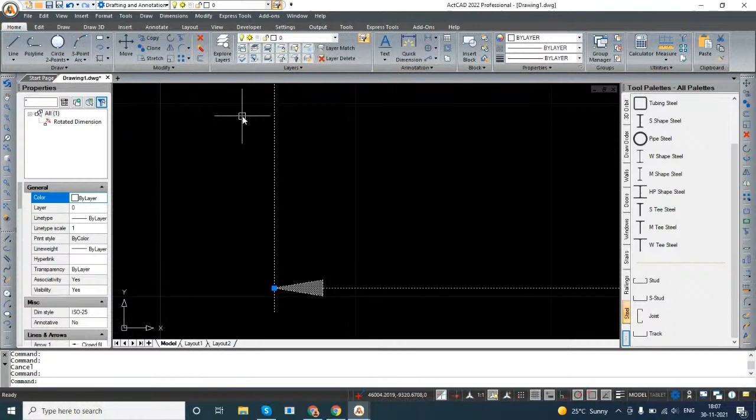Now coming back to the annotation, I'm selecting one linear dimension from here to here. So though we call it a dimension entity, right now the text height is very small, but it already has its own arrowheads and everything. But now let me select this, it is a single entity. That is how the software is creating it as an entity and storing it in the database.

Now when I'm exploding, you see here, now this is an entity, this is another entity. These are all straight lines, and that may be a solid hatch, that is what you are seeing there, a solid. Similarly, if I'm selecting the hatch, though it is a single entity, now if I explode, you see it is a combination of all lines. Why I'm telling this is, any entity, whether it is a 2D drawing or mechanical drawing or dimension or hatch, most of these things are all combinations of these primitive entities.

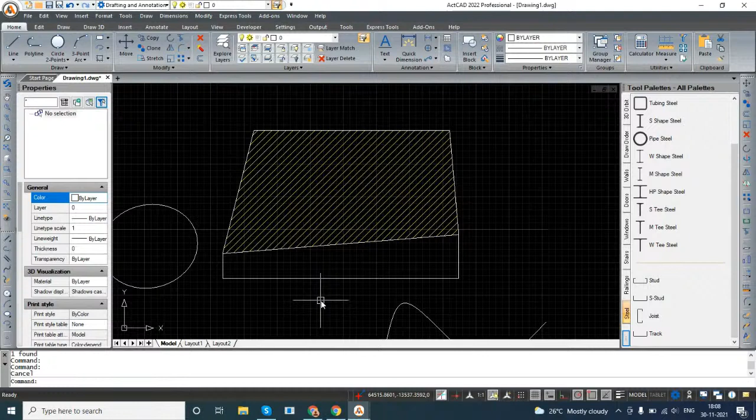When you are coming to 3D modeling, again that is a combination of primitive solids, like the basic block. Those are called the primitive shapes: block, cylinder, sphere, and cone. Any geometry is a combination of these four primitive shapes, and you can perform some Boolean operations like uniting them. Again, in mathematics we learn unions, subtractions, and all these things, so the same geometric principles we apply here.

If you want to join two bodies, we do the union operation. If you want to cut one solid from the other solid, that is a kind of subtract operation. If you want to find the intersection volume between two bodies, you can use the intersection option like that. So whether it is 2D or 3D, they are based on these regular basic entities and the primitive bodies.

So properties palettes, tool palettes, all those things I have explained, and the print and plot dialog also I have briefly shown you. But whatever you designed, you can always use ActCAD 2022 PDF printer or your local printers or image printers. You can create anything, and all these options are similar to, if you are familiar with any other CAD software, they are very much similar to that one.

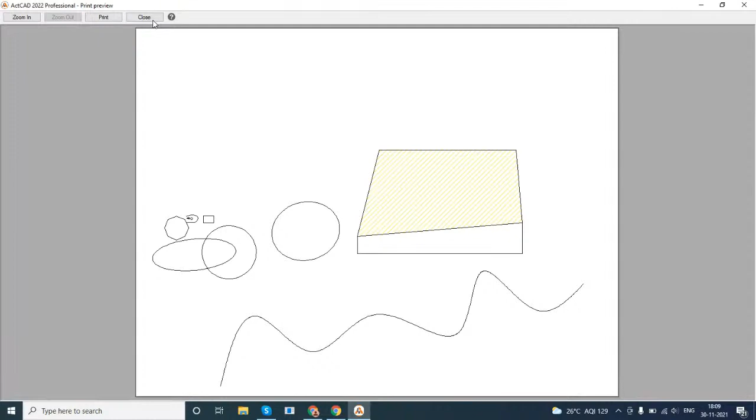You can see the preview, you can apply the colors, you can apply styles like displayed, wireframe, or rendered mode. You can also apply CTB files or monochrome. I have applied icad.ctb to this one. Now if I go back, those settings are applied to my preview. Once this is done, you simply print. In this computer the PDF printer is not activated as of now, but you can directly print to a PDF printer. Similarly, you can also do the export. Export PDF option is also very powerful here.

In the export command, you have PDF, SVG (scalable vector graphics), BMP, Windows Metafile EMF, and stereolithography. When you have a 3D model and want to send it for 3D printing, you can export it to STL file format. Collada, web formats, MicroStation DGN, IGS files (initial graphic exchange specifications), and STEP format are mostly used for 3D.

So now for the time being, I'm using PDF. I'm getting a detail option about whether you want to embed any fonts. If you have any 3D model, you can also enable this option, which will make it a 3D PDF. So even 3D models can be saved as a 3D PDF. That capability is there in ActCAD software.

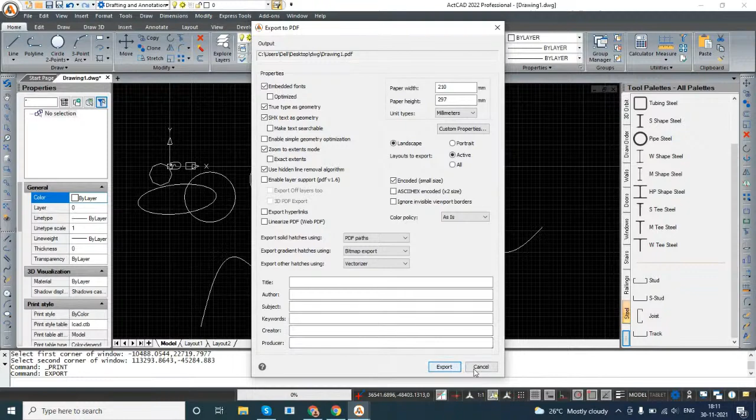You will be able to open them in any regular free PDF viewer like Adobe Viewer, and you can rotate them, view them, and scan them. Now I'm setting, if you want to set any properties to your PDF file, you can do so. And finally, you can save that PDF file. So export completed successfully.

Just want to double check what is the default path. Okay, so it is in this DWG folder, it is there in this location. Now, instead of exploring from there, I can directly open it from here. Now, this is the PDF in vectorized format it has exported.

This is normal Adobe viewer. And you can apply all settings in the standard plot dialog - you can apply your styles, monochrome or CTB, or you can define new styles, STB files, and the definition also either you can do as displayed.

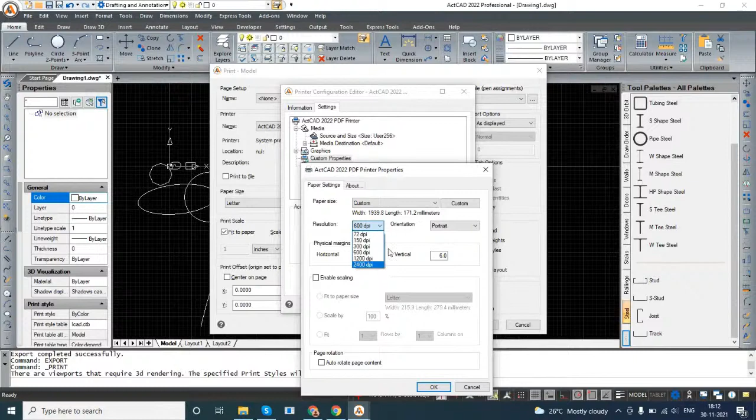And in our PDF, multiple settings like custom settings, custom properties, custom paper size, multiple ways, and the DPI - we support up to 2400 dots per inch. Very high resolution PDF also you will be able to create through ActCAD software. So this is our standard plot dialog, very much similar to other software.

Now let's discuss blocks. When I mentioned in the add-ons, I showed there are so many standard blocks we have created - more than 5,000 symbols. For example, I wanted to insert some GD&T symbols. This is the cylindricity control I have inserted here.

I can use a different scale in X direction, Y direction, and Z direction, and the rotation angle also I can keep at 45 degrees. Now what do you mean by these blocks? Blocks are standard symbols. You can copy, paste, and use them any number of times in the drawing.

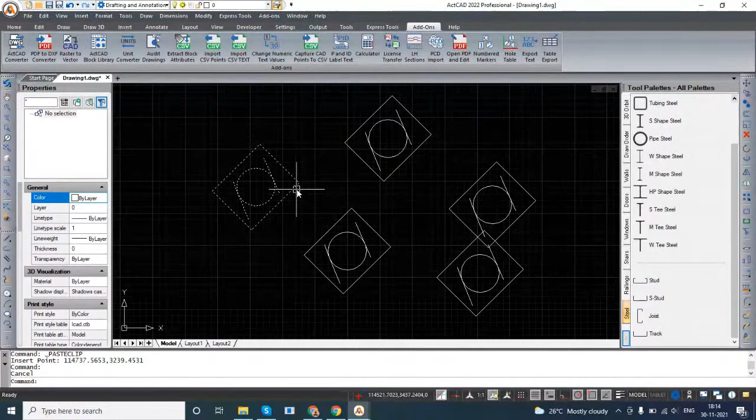So I simply copied and did Control V, Control C, Control V. Now, what is the advantage of this block? I used it at multiple places, but in my drawing it is stored only in one location - in one table, this block is stored.

So today, if I want to edit this block, I'm doing a command, double clicking this. Now I got this - either you want to edit this Western commode or this GD&T 10 symbol. I want to edit this. Now I went into edit mode. Here I reduced the circle diameter.

Maybe this line also I moved - I'm not doing it precisely. So I made some changes to this one. And also, just for the sake of understanding, I have rotated this and kept it like this.

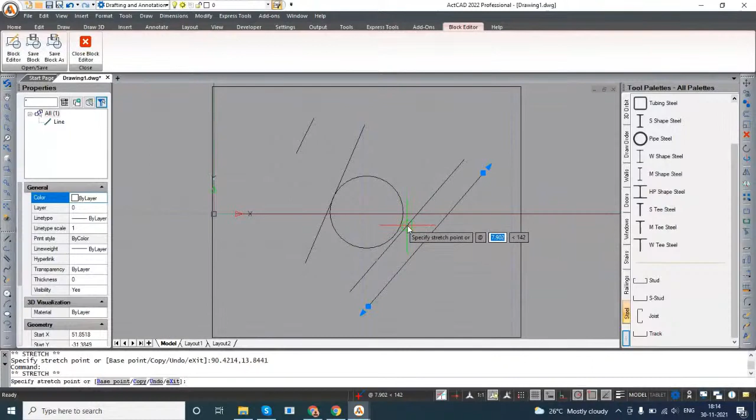Now I'm saving this, closing block editing. It is asking me whether you want to save the changes or discard. I saved it. Now when I made this change, you see the changes have reflected at all other places inside the drawing. So basically, it is referring to the same geometry from one place at all other places. That way, even if you have 1,000 seats in your theater, you are not duplicating that geometry at 1,000 places. So your file size will be very small and compact.

Now, what about XREFs? Blocks always reside in a particular drawing file. Now I am saving them on the desktop here.

Okay, now I saved this. I am creating one more drawing. This is our new drawing - either you create from template, from wizard, or you open from something else. I have multiple options to do this.

Now, going to the insert menu, I have this XREF - these are the external references. I want to attach my previous drawing, that is drawing 1, as an attachment inside this drawing. The insertion point is 0,0. Now it's asking what scale I want to insert - scale 1, X scale 1, and no rotation. Okay, now that symbol has come and got inserted into this drawing.

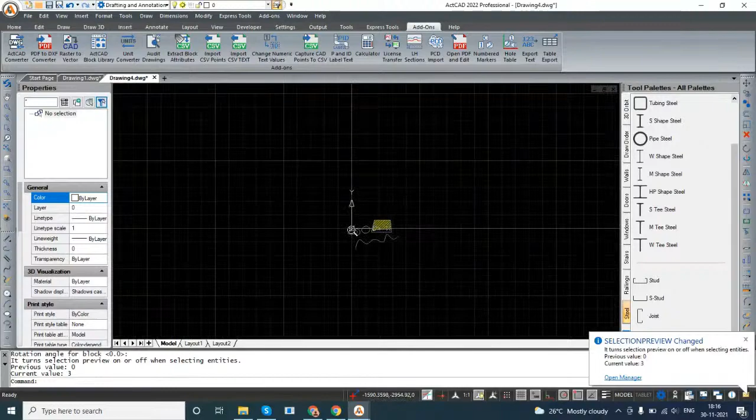If we are in doubt, we can go back to the XREF manager to see where exactly it got inserted. This is the path. Maybe it became too small or too big for this drawing.

I will take a fresh drawing instead and insert this as an XREF there so I can clearly see it, instead of wasting time attaching and selecting this drawing.

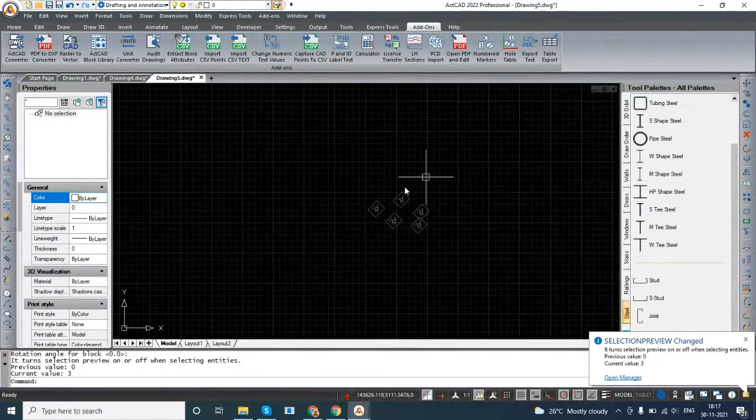Oh okay, everything has become XREF, including these blocks. Sorry for that confusion - I thought I created the drawing only for this one, but everything here is part of that particular drawing.

Now, what is the advantage of this one? I am going back to this. I have selected it, and now I'm scaling up these things from a base point, scale factor 5 times. I have increased it, and also made some more changes - I changed the shape of this spline.

Assume that this is my base design which I wanted to use as a reference. If you come back to this one and reload it, now it's giving a warning, showing what changes are happening, and you can select them, open them, and update them. So the changes I made are already reflecting in my other drawing.

So what is the advantage of this XREF feature? Let's assume you are having a mechanical or structural drawing. This is the base drawing which I want to use as a reference at 3-4 other levels, like casting level, forging level, or machining level. I can take the same drawing as reference and use it at multiple places.

But once those changes are completed, it always has reference to the original model. So whenever I make changes to this, all my upper level drawings - forging, casting, everything - sees that geometry. Most importantly, this geometry is not saved inside this drawing file; we are only using it as a reference, so even if it's a very big drawing, it doesn't add any size to this particular drawing.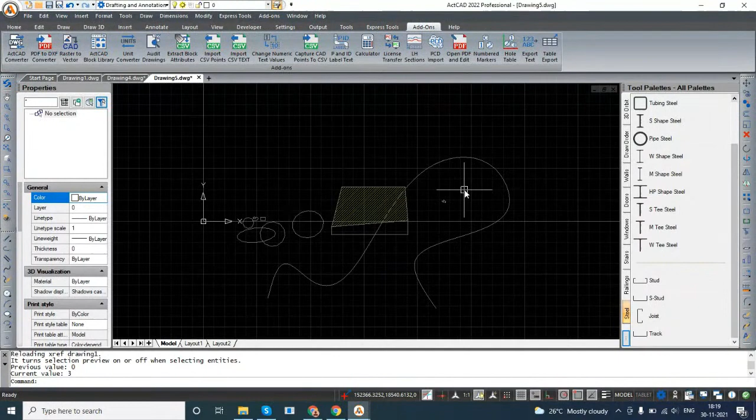So I explained the uses of blocks, uses of XREFs, and finally the OLE objects. If you want to insert any data from an external Excel sheet, Microsoft Excel workbook, I can create new or create from a file.

Now I'm selecting desktop. We have demo kit. Okay, I'm having some CSV data here - as a link, I can create it. Now it is inserted. If you double click this, now it opens in the actual Excel application, and you can make a lot of changes to that Excel.

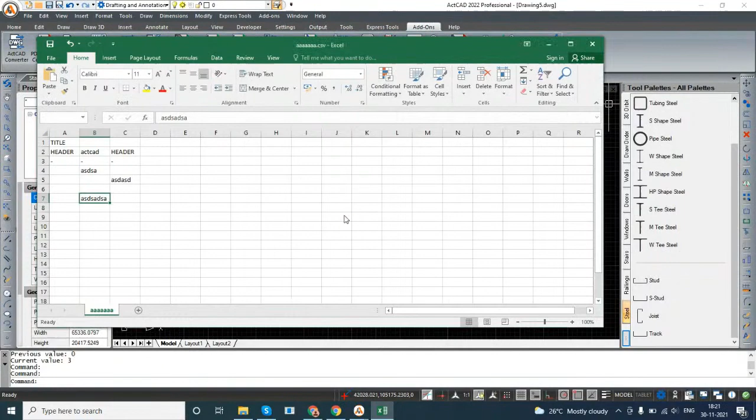And hit the save button, yes, and close. Right now, because it's only a link to that one, if I double click, it opens that Excel having all these entities.

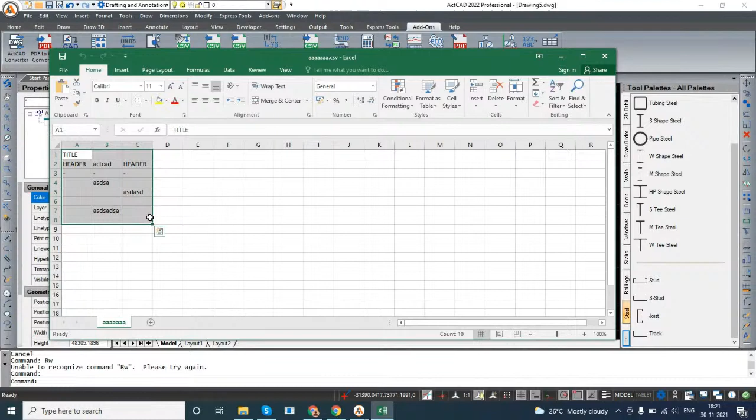But if you want to directly import it as an external reference, you can directly import from that also, and we can also do paste special.

So I'm not finding any Excel sheet here. Maybe let me open this table data. So copying all these entities, going back to ActCAD, paste special. Okay, now it is showing me Microsoft Excel format itself.

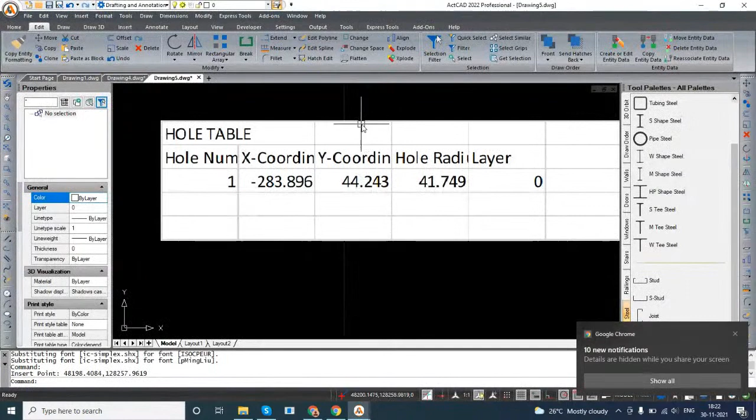Now you see when I did that, directly that is embedded as Excel format. Now I'm closing this. Now you select on this border and double click. Now again this data got opened. Now I'm typing some more values and also changing some of the cell background color.

Okay, and again hit this floppy button to save. Come here. Now the changes are reflected here. So what is the difference between the original one and this one? This I kept it as a link, the original one.

Now this I directly pasted as text, so it doesn't have any link to that one. Now this is having, this is the OLE, object linking and embedding. It is part of your external data and has the complete link to that one. The original one also has a link, but the preview was taken directly from that.

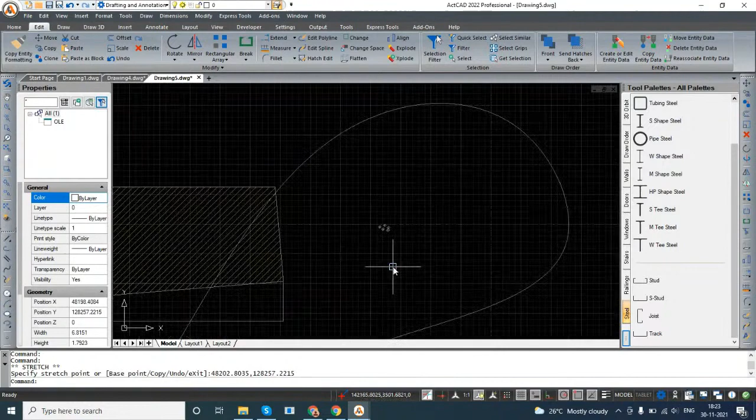So this object linking and embedding you can do with any of these office objects like MS Word, PowerPoint, Excel, and also PDF files. These are the standard functionalities like any other software available here.

And apart from that, we have a lot of add-on tools like this one, PDF to DXF converter. I'm using this from the demo kit. I'm having some drawing which is in PDF format. I am directly opening that PDF as my drawing.

So now you see it became our own drawing. Now I'm able to select these lines, I can delete them. Okay, now this is all hatching, and this is now a line. So everything got converted into lines. Now it became your drawing.

You can also have the PDF conversions, and a lot of additional options are available. And we also have some image converter. So here I'm having an image. We also have some inbuilt tool.

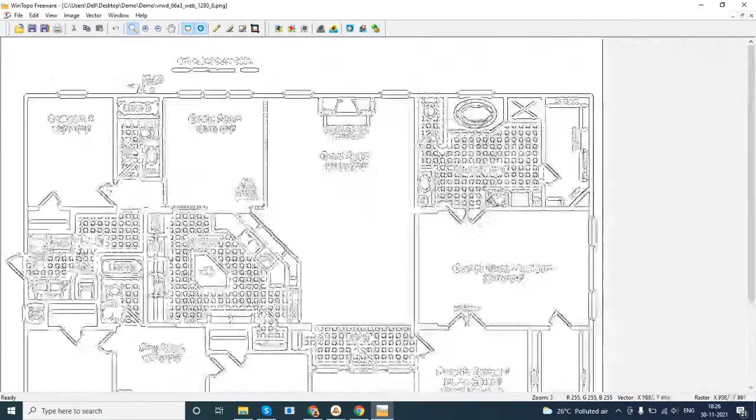Though the quality of this image is very poor, maybe I can go to the internet and grab some line drawing. Sorry for that. Okay, so here we are having some images available. These are all line drawings having some arcs and curves drawn, which I wanted to directly import.

So for the time being, I'm selecting one of these images and saving it, because I'm trying to find some quality image for my converter. Now I saved that image to the desktop. Now I will go back and open it, because this I can also scan, but the quality will be very poor.

So now I have opened this, and here I have one-click vectorization option. That's it, now everything got scanned. If you notice, these are the green lines which got digitally scanned onto this one. Now I have an option to save this vector in DXF format onto my desktop. Now whatever conversion I did, I saved onto my desktop.

Now go back to ActCAD and file, open. Now changing this format to DXF and hit on desktop. Now you see all these lines are now part of your ActCAD. Now these are all the entities, it is a polyline. Now you can select, you can apply colors to them.

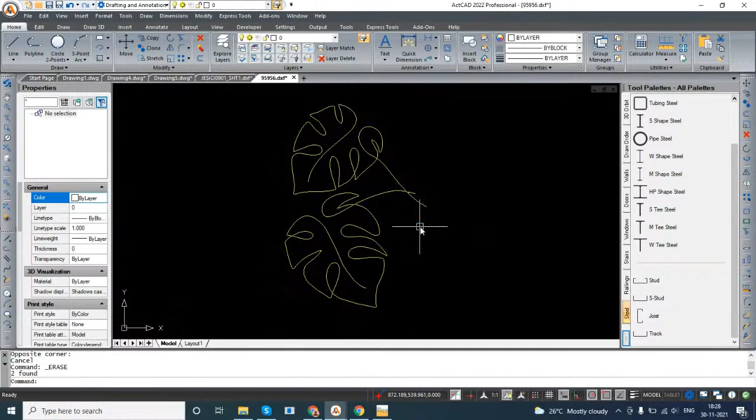Okay, maybe you can apply yellow color, or some of them you can do, or you can also explode them and make changes. Now they are all part of your drawing. If you want to make any change to this, or if you want to delete, you can do. So like this, we have this raster to vector converter also available in the software.

So like this, you have a lot of capabilities right from basic drafting to advanced. Even though I'm not covering the 3D modeling aspects, you do have this one. Maybe if our time permits, we'll conduct one more session in the near future. Then I will cover more options about 3D solid modeling, solids editing, and facets. But again, remember, as it is a low range CAD software, it doesn't support parameters and expressions.

It is very much similar to AutoCAD. You can create all these ACIS 3D solid modeling, unparametric models you can do. You can modify them, edit them, delete them. You can also perform all the Boolean operations.

All these options, you can apply materials to this 3D. So if I'm changing this workspace to drafting and annotation, again you can find all of them here under Modify. Here you have the solids editing option, so again all these options are available. 3D operations, now you are having these things. And finally, you also have the primitive operations like Boolean operations available under this, like union, subtraction and all.

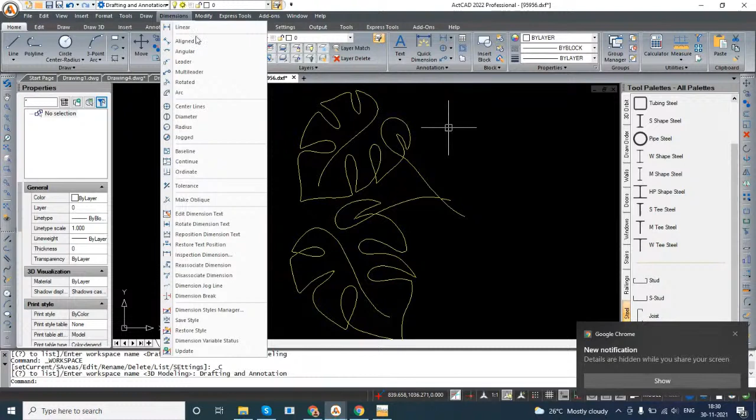So now I want to stop my presentation here, and once again I want to quickly go through the contents, if I have skipped any of the important aspects. I introduced you about what is CAD and the history and the development, the three categories of CAD software, the history of DWG file format, its versions, the background, the developments, the legal battles between the two entities which can read and write DWG, and the brief history about ActCAD and the legalities behind it, and the interface, layout design, menus, the logical design of the menus and the tabs, the importance, how to easily navigate, or you can also find the quick command finder, or you can use the complete help, and the classic style interface, ribbon style interface, keyboard shortcuts, how to create the keyboard shortcuts either interactively or through CUI file.

What about aliases? Aliases also you can customize, you can create new, you can modify the keyboard shortcuts, you can create your own toolbars, you can remove the existing toolbars. All such options are possible. You can also use the CUI file and CUIX file with respect to the other software.

And what are all the file formats supported? I think I forgot to show you the other formats. Like in the import, we support many other formats apart from DWG and DXF, like ACIS solids, BIM like IFC, Revit files, DGN and MicroStation DGN files also you can open them, DXF, IGS files, object files, PDF, STEP, STL import.

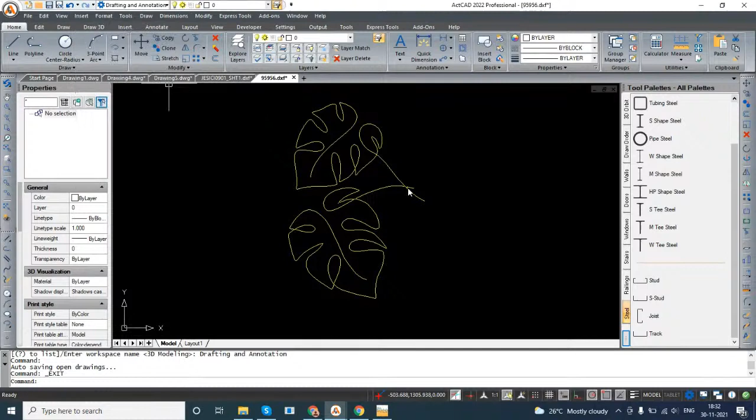Similarly, we have the export like ACIS files, BMP outputs, DGN output, DWF, DXF, IGS, STEP, STL, WMF. And also I showed you about the 3D PDF, 2D PDF, converting the image formats and inserting nearly 700 types of images. Even AutoCAD doesn't support those many. If you go to the insert image manager, you have hundreds and hundreds of types of images which we support. So that way we are more strong.

Let's allow 2 minutes to see this. And in the meantime, I have also explained about the concept of layers and their uses, how many layers we support, infinite number, model space, layout, what are viewports, what are their uses, a brief mention about the annotative scales, and zoom, pan, ortho operations, entity snaps, object tracking. And I briefly showed you the 3D, 2D entities like line, arc, circle, ellipse, rectangles, polygons, polylines.

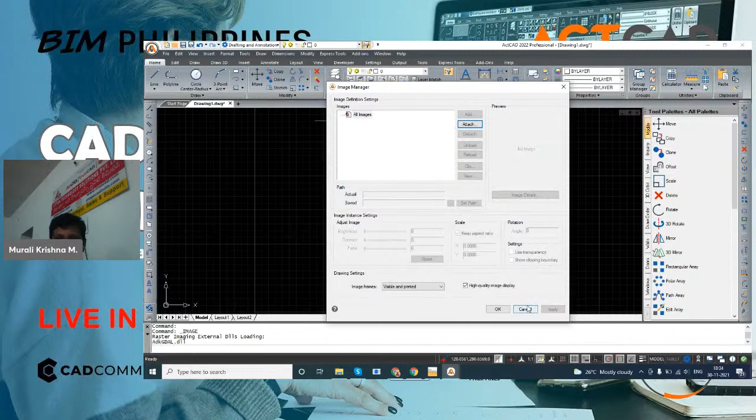And not only that, in the underlays, you can also insert the BIM underlay. You can do this like Revit files, IFC files, PDF underlay you can do, DGN underlay you can do, DWF underlay you can do, point cloud you can do, and we also support a lot of things. And we also have the geolocation feature. We have uploaded a lot of videos on YouTube and also to our own channel about all these options.

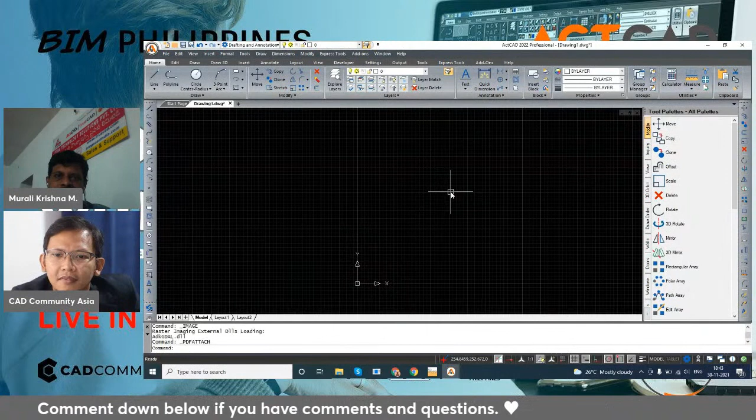I guess this is the last question, always asked - minimum system requirements to get things going. We have mentioned this at the bottom of every page of our website.

It will work on Windows Vista and above - Windows Vista, 7, 8, 8.1, 10, 11. A 2 gigahertz and above processor is needed. Our latest version works only on 64-bit, but if you need 32-bit, you have to use our old version like ActCAD 2020. RAM should be 3 GB or above, and disk space at least 5 GB.

Graphics card is not compulsory, but if you have any graphics, either onboard or dedicated, keep the drivers up to date - either motherboard drivers or graphic board drivers - to get the best performance out of this software. So any normal PC or laptop can be used to run ActCAD, even for high-end projects.

Any upcoming plans on taking this to the cloud? No, actually we support this software not only on Windows, but users can use it on other platforms like Mac also through some third-party plugins, like a Wine plugin if it's Linux, and there are some tools available. But Windows operating system is required even on Mac to run ActCAD software. We don't have any plan to host it on the cloud.